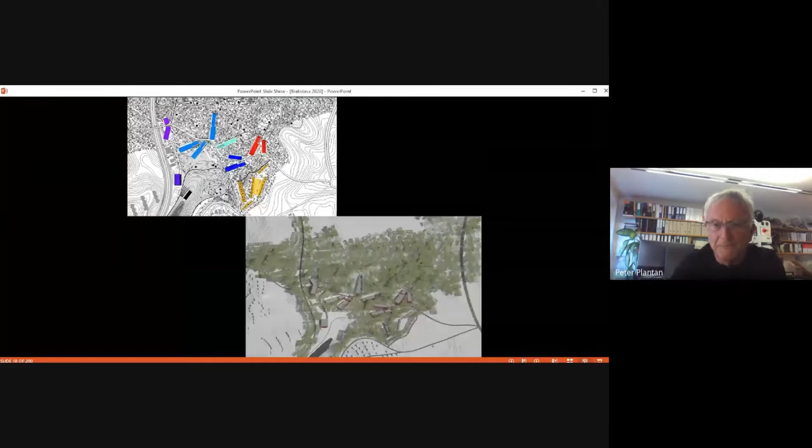It was, of course, wood, as you saw on the pictures. This is a kind of thinking of—I like renderings that leave some space also for imagination.

Elementary school in Novo Mesto. The project is a very old one. It's a project on the southern part of Novo Mesto, spreading its wings to prevent the invading dwelling or building of neighborhoods, so as not to invade the very beautiful valley below this school building.

The school building is composed of 3 parts. The central part houses all the common programs, meaning the main hall, entrance, main hall, access to the valley, and also the spaces for teachers, and below it all there's also a gymnasium. But the wings are shaped differently.

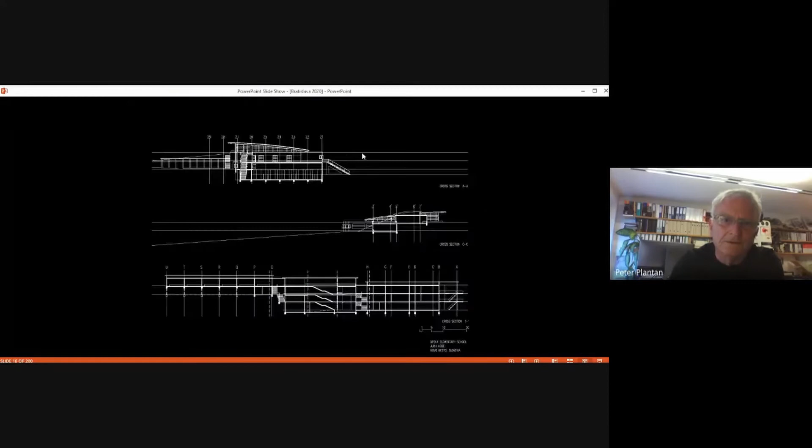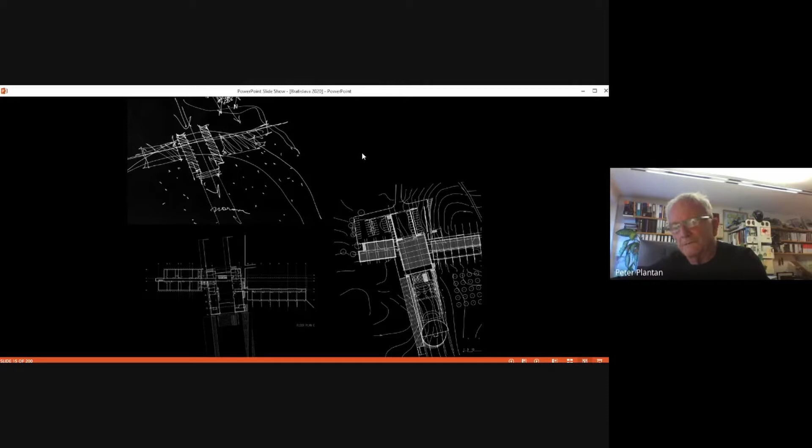On the left side, you see the wings following the slope in cascades, so that each wing is meant to house the younger pupils, so that all pupils can have their own access to the natural greenery. And on the west side, housing the bigger pupils, it's shaped in a more abstract and functional block, meant to light their curriculum in these spaces.

Secondary school for nurses in Ljubljana is a kind of conversation with the culture of the city. We called our competition entry 'the Palace,' making specific reference to typology found within the urban fabric of Ljubljana.

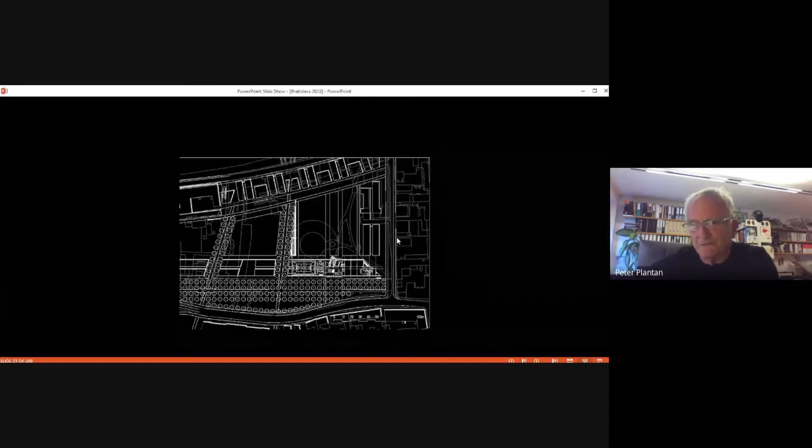So this is the face of the school, also divided in 3 parts. The central part has all the common program—library, entrance, lecture hall, and so on—and 2 wings with classes.

The facade towards the heavy traffic road references Slovene architecture. You see on the left side famous Savin Sever using a secondary facade with a very clever solution, because it's quite often that a secondary facade provokes a problem of sound penetrating from one space in the building to another, so that the space between the first facade and the second facade must also be divided if we don't want to have the same problem.

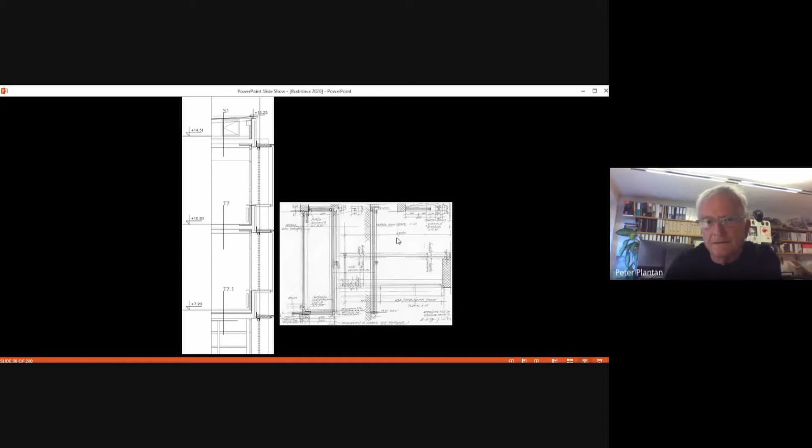See this, of course, our study of this glazing, double glazing.

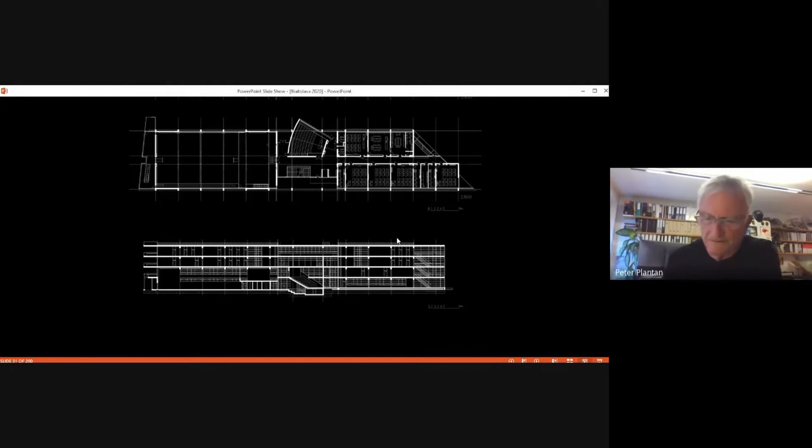And here you see how also the gymnasium is incorporated in the thin body of the school, as I said before, to save as much space as possible for the school playground. And here the span over the gymnasium is formed by the walls among the classes above. Of course, for everything, many sketches are made.

I present 3 open spaces in Ljubljana. We made quite a few, but let's say these 3 are very interesting, very different from each other. First is the park along a small creek, Gradaščica.

This is a gladly abandoned area in the very vicinity of the center of Ljubljana. We see here the entrance road to the center of Ljubljana, with a bridge at the upper level. The bridge gave us a bit of a problem because the span was already calculated and quite short, and the bridge needed to be very wide, so we had to find a way to prolong it.

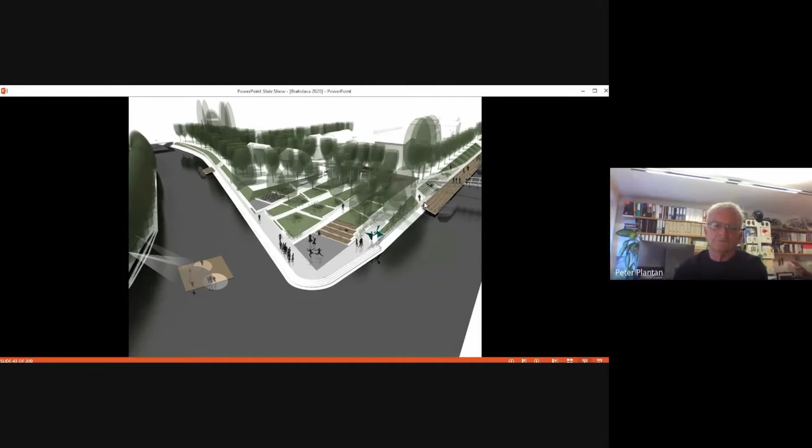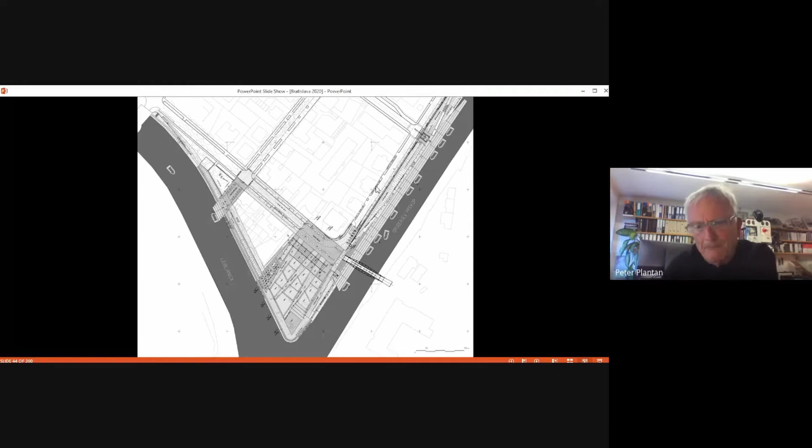It is composed of two parts. One is a slight slope going down to the Ljubljanica, and the other serves as an embankment for quite a few new boats now floating on the Ljubljanica. The modification of the park again listens to the urban fabric, and the slope is formulated by cascades and partly covered with wood. The situation is really marvelous.

It was quite a wonder that it was abandoned for such a long time, but it was not abandoned 4,000 years before, because when starting to dig in this area, a big settlement of those pile dwellings on pillars was discovered, so we had to modify the modulation of the relief, because of course those pillars shouldn't be uncovered.

They are still resting there. Some of these are of course preserved in museums, but this preservation is very costly, because wood being in water for so long doesn't resist touching the air once removed. Of course, some elements are also present here - this is a kind of bigger pergola serving as an open-air museum or exposition area for the visitors of the park.

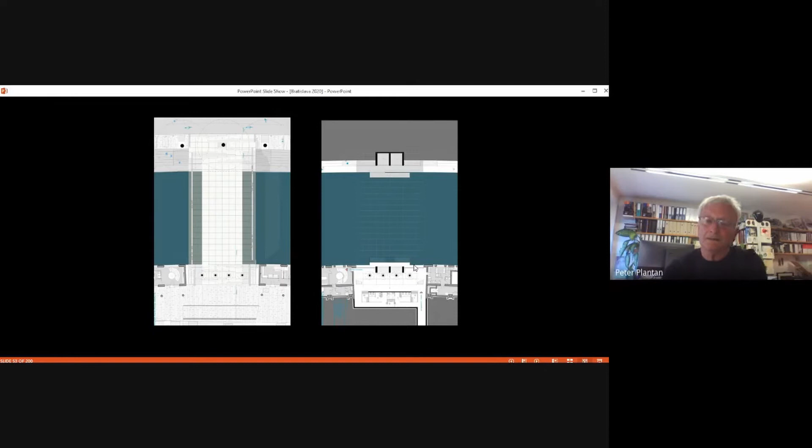It is very important also because underneath there is quite a dense program. It's an embankment for river traffic, it's a public lavatory, it's an entrance to the planned garage, and it's also an open space for a bar and a smaller restaurant. So the lower level of the bridge is very important too. You can see how wide this bridge is.

It's really actually nearly as wide as it is long. And because of the story of the butchers, on the part where it meets Petkovškovo nabrežje, Petkovšek's embankment, our sculptor Jakov Brdar made a sculpture, of course.

No, I'll... Prometheus. I'm sorry. Words go out.

Because this bridge is so wide, we made both sides of the bridge... this is a part of the lower level of the bridge, and you see we planted poplar trees in Plečnik's arrangement. These poplar trees were removed because of construction of the bridge, but in this picture they are still very young; now they are becoming bigger and bigger.

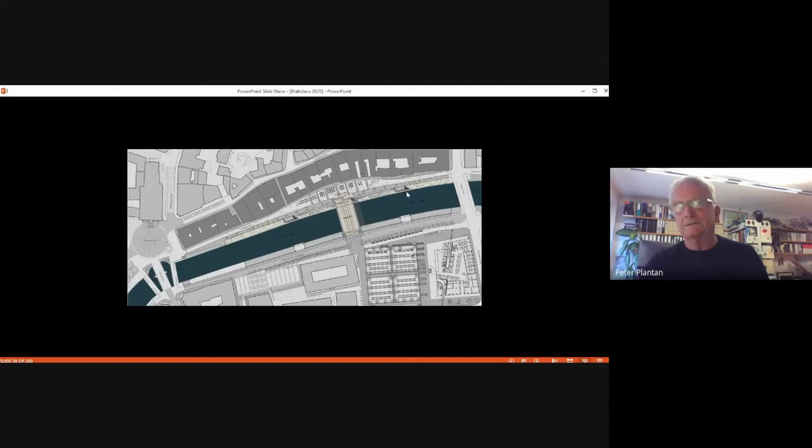So the Petkovšek embankment plan was actually very simple. We only had to arrange the quite abandoned area, suitable for bars and restaurants along the newly formed embankment, and they exploded in popularity a minute after construction finished. As I said, the arrangement was very simple.

The only thing we wanted to do but did not succeed was to make cascades down to the river bank, the very river bank. We were not allowed because the officers in the preservation office didn't want to permit it. It's still a painful experience.

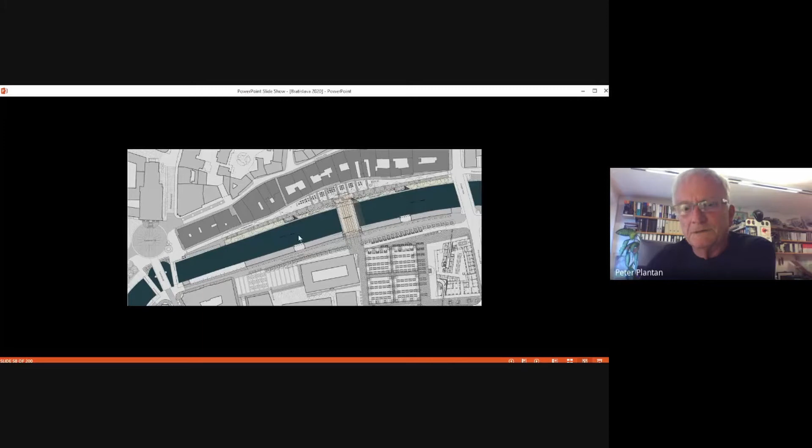So the only accent of our arrangement in this refurbishing of the Petkovšek embankment were two terraces made exactly vis-à-vis Plečnik's pavilions or tempietos, breaking the long building of the butchers' building. And a nice atmosphere.

In Maribor, we were also lucky to win the competition for arranging, actually performing, a complex in the minority... the Minorite monastery, sorry.

It's on the southeast corner of the center city of Maribor. The monastery was abandoned by law of Joseph II, because he closed many monasteries around Austria, and so was the story of this one.

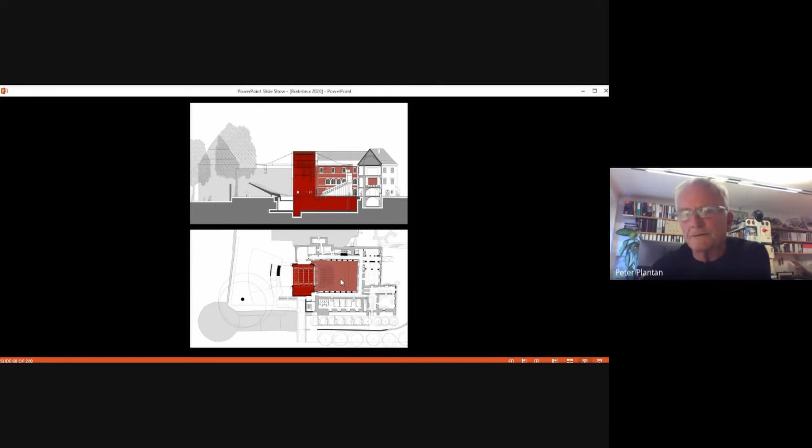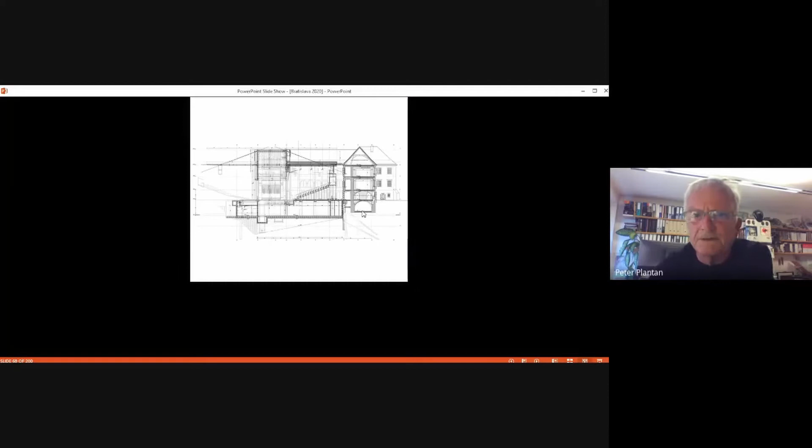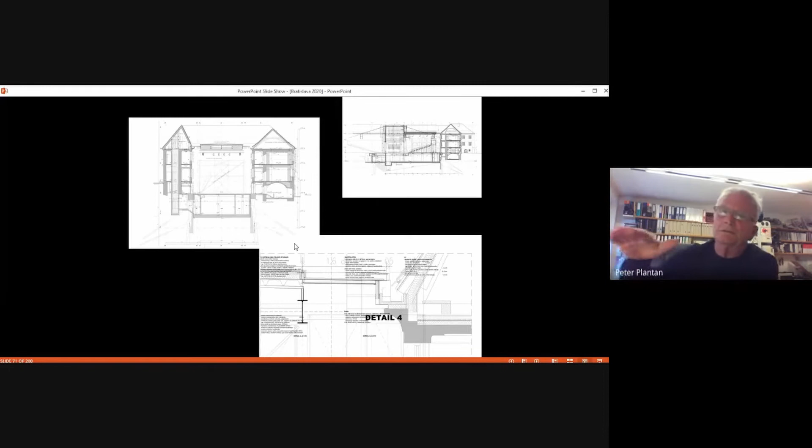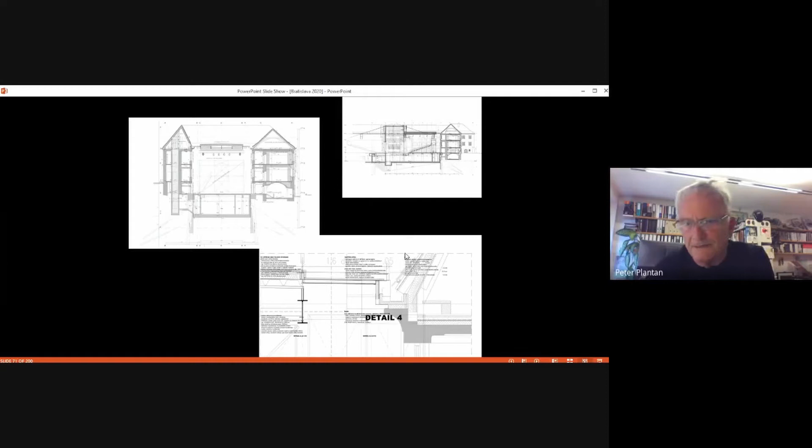Including the roof, which is carried by this fly tower, so that the roof does not touch—actually it touches, but does not lean on the existing structure. There's quite a clever detail, because the roof, being a kind of console, is also moving, and you must calculate how to design this touch between the new roof of the theater and the roof of the existing structure.

But there is also another embarrassment in puppet theaters, namely puppets can be very small, down to 1 decimeter, but they can also be 3 meters high. So we had to find how to adjust the adequate atmosphere and space for these different types of performances.

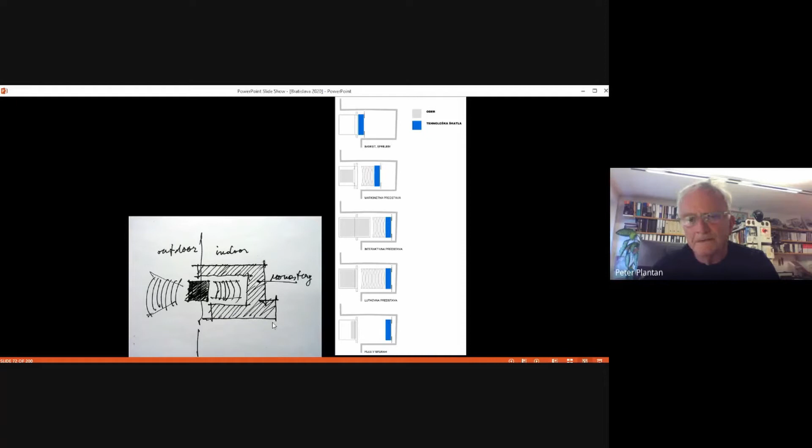So we invented a kind of movable wall. This movable wall contains all the light and sound cabins, and also first serves as a magazine for seats. This movable wall can move towards the stage, leaving all the space of the monastery atrium free for special types of performances.

So this is the stage, or the main hall as it is functional, as we were not allowed to make acoustic panels on the facades. The acoustic panels are only on the roof and the shutters of the windows.

Here you can see it's quite a complicated construction, and very thick. And here you see the back side of this movable wall. We also didn't want to touch the existing walls or ceilings for the other spaces in this theater. So everything is very carefully designed regarding how to touch, because this touch is very important.

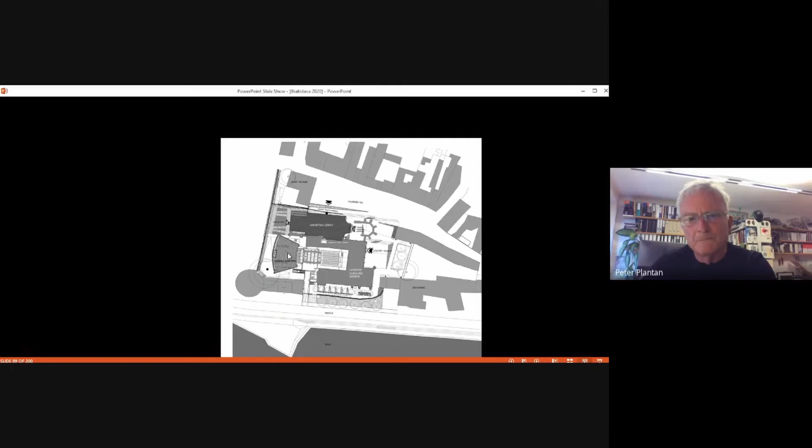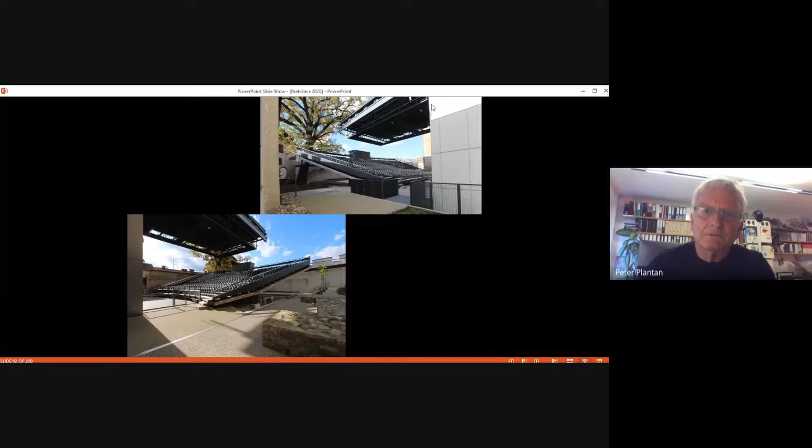So details are every time important. And as I already said, on the other side of the fly tower there is an outer space with about 600 seats, and all the machinery is situated on the roof, which also expands, with a cabin situated in this kind of flying atmosphere.

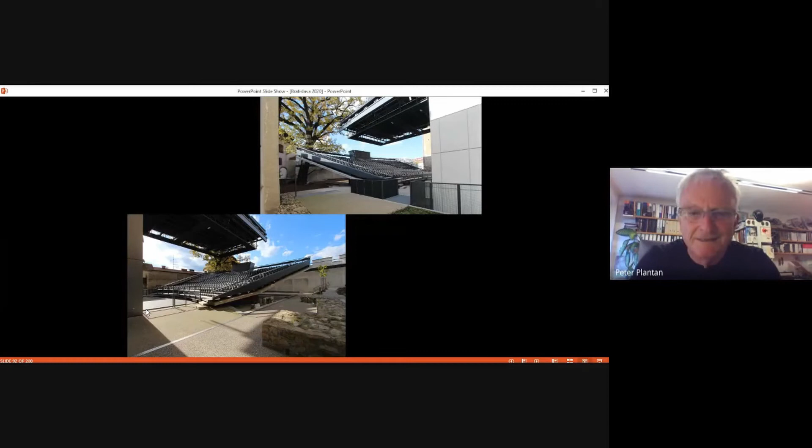The very important element of the theater is, of course, the bar that is open during performances, but should also be closed during times out of season.

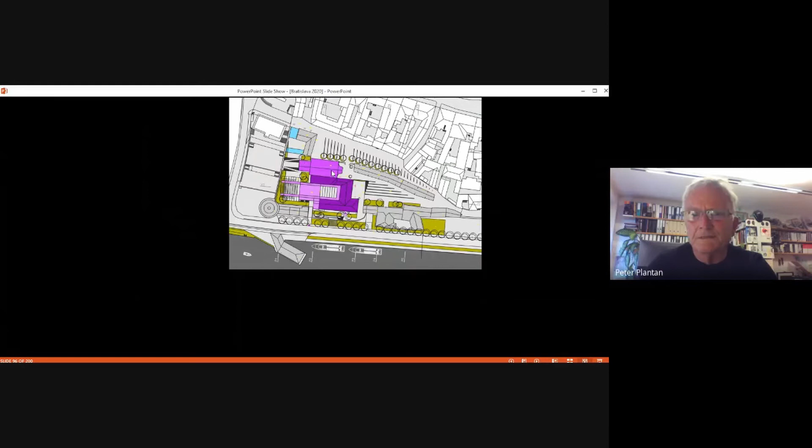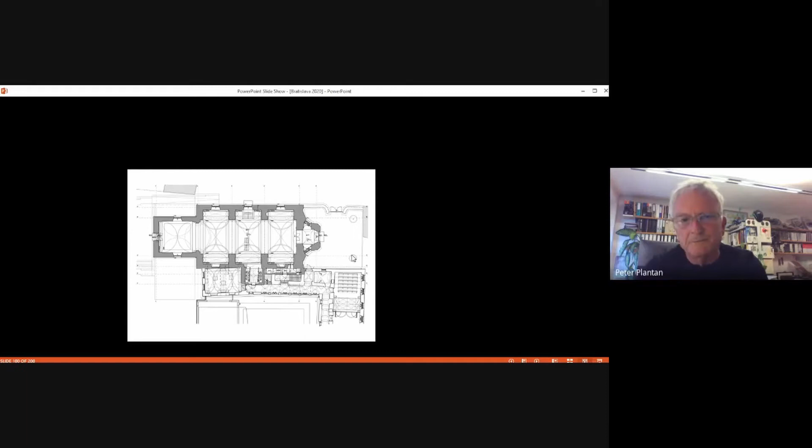The third element of this performance area is a church that was really abandoned and transformed into several types of functional spaces, so actually nothing original was preserved. Our task was to clean it and refurbish it as much as possible into its original shape. These are measurements that were made, and the church has its upper, or parterre level, and a small entry from the cellar of the monastery.

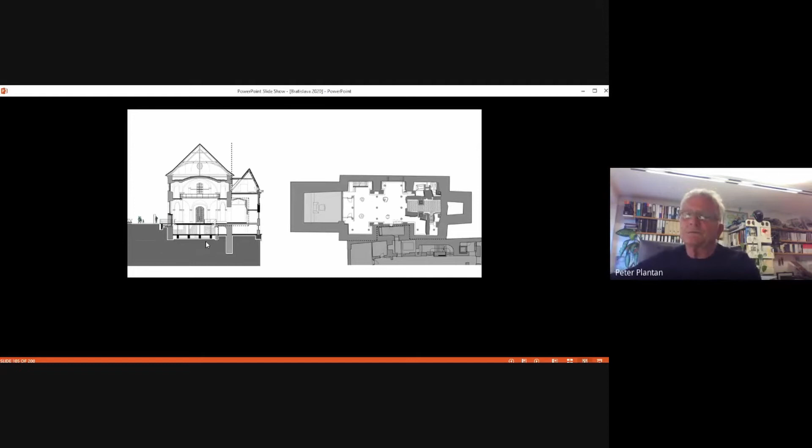As is always very interesting in refurbishing old constructions, the excavations revealed the whole cellar of this church, and in this cellar there were foundations of a Romanesque church from the 12th century. This became a special space for performances and exhibitions, with a special intimate atmosphere.

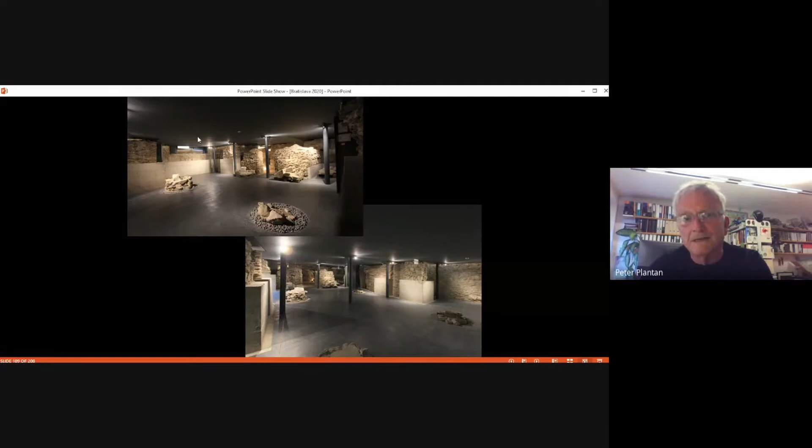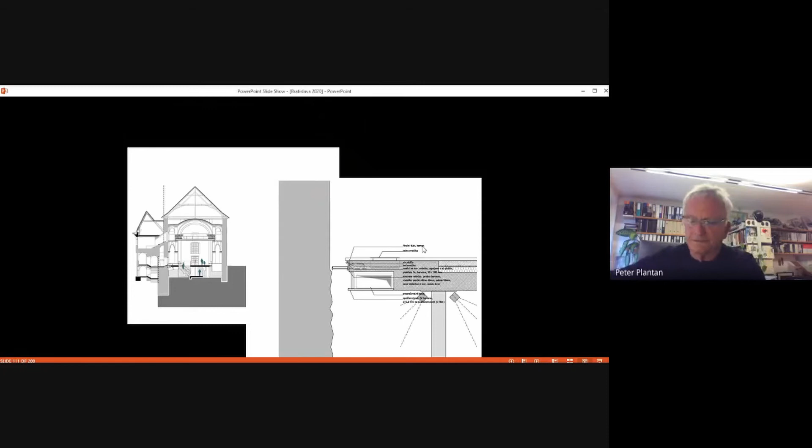And of course, how to make this plate, the construction of this new parterre. We made a concrete plate that does not touch the original structure, but includes all heating and ventilating facilities within this corpse. So from above you can see the upper floor through this gap. Partly the upper floor has openings so you can see the lower floor. Some details again, everything avoiding direct touch of the new to the old.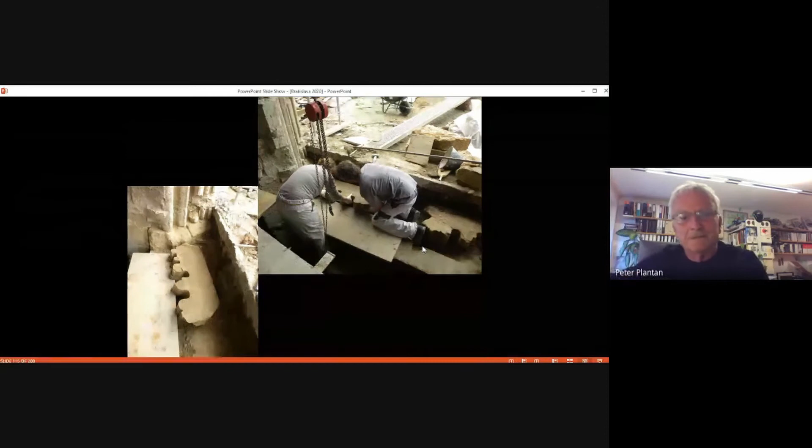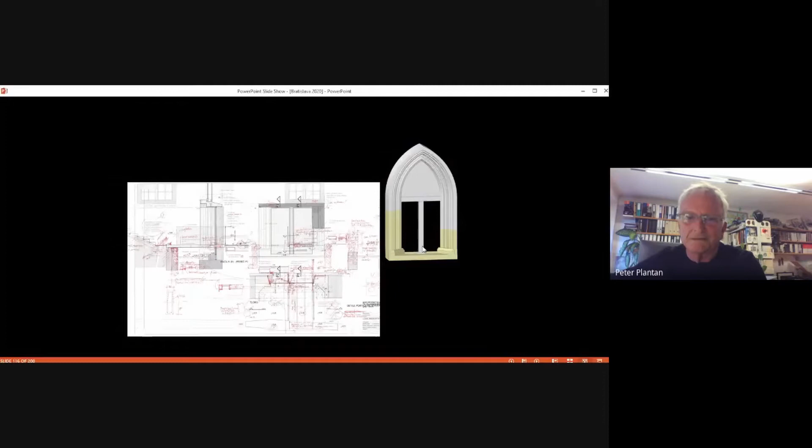And as every time, there are new discoveries, and a new Gothic entrance was discovered. At the end, when we were already finishing the project and the construction, this new entrance was discovered. You can see how time is merciless, and the Baroque opening didn't want to think about what was in the past. So now this is the entrance showing all stages of time in one side of one big frame.

Refurbishing the opera house in Ljubljana is - I hope I'm not going too long. What's the time? No, you are just perfect, you are not too long. Please continue.

The opera house is very typical for Slovene circumstances. First, of course, came the decision that the National Theatre would be built. This was at the end of the 19th century, and the first project was by the famous Austrian pair of architects, Fellner and Helmer, who made several theaters all over Austria or the Austro-Hungarian Empire. But of course it was too large and too costly.

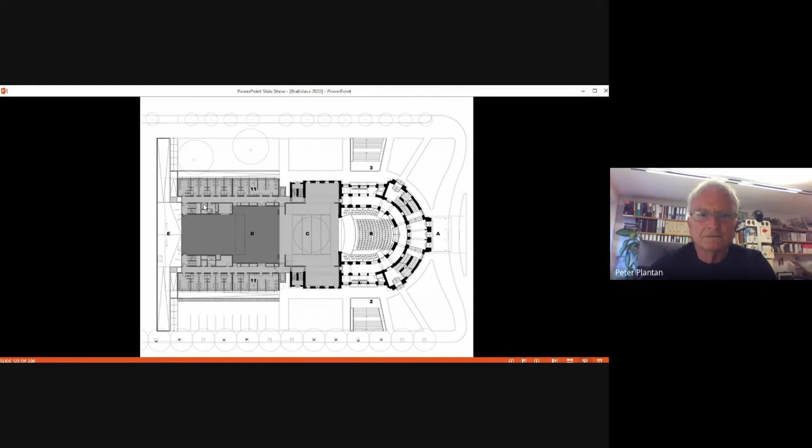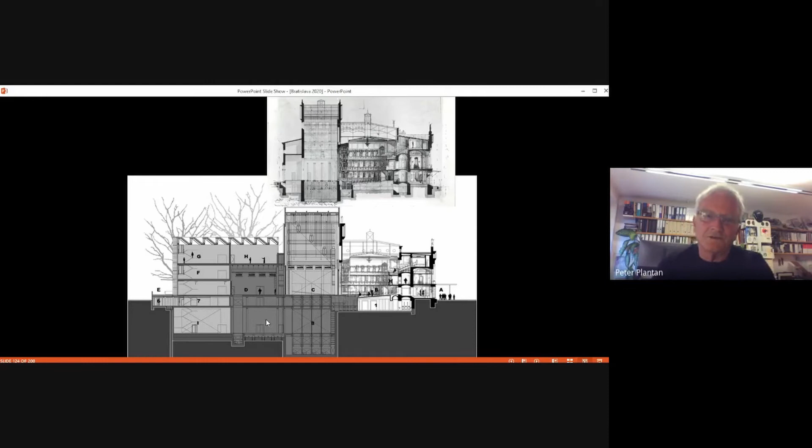We prolonged the building to make, at the lower parterre level, the entrance and backstage. Of course this backstage goes down too, with spaces for wardrobes and all else on the sides of this central space. Because we could not move outside, we found the space for the public during the breaks under the existing parterre of the existing house. Here you can see how big this new restructuring and refurbishment of the building actually was.

Here you see the backstage, the entrance, and then rehearsal halls in the central part, and in this section - I don't have it - the new spaces for the public during the pauses, also a new entrance with the ticket office, spaces for publicity, lavatories, and everything that goes with public access.

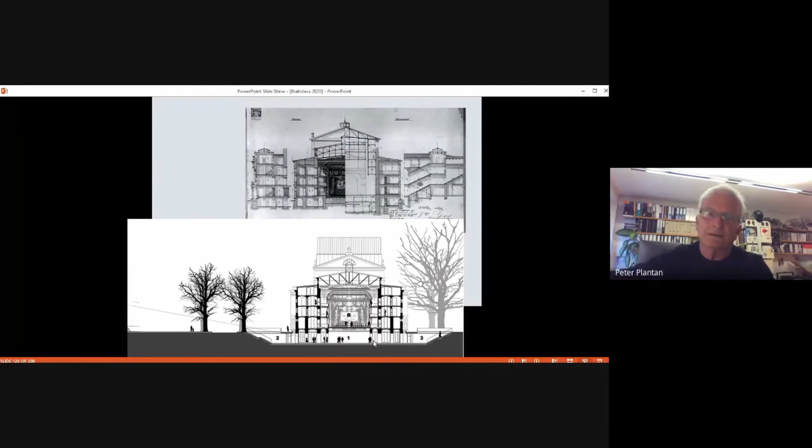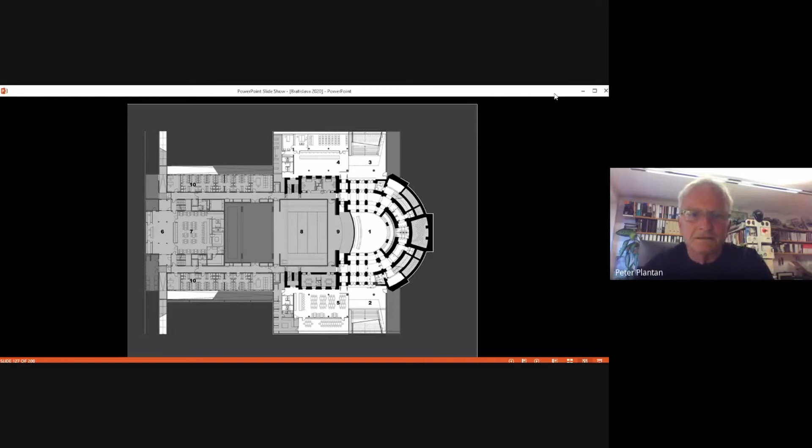Forming two atriums, this denivellation makes it a bit less harsh. Of course, when this structure began, there was quite a revolt, because the new addition was quite brutal, but it was really very necessary, so that everybody working now in the opera house is very happy.

Here you can see how the lighting works for rehearsal. It's a very simple solution, but all the technical stuff like heating, ventilation, and so on is incorporated into this part of the ceiling or roof.

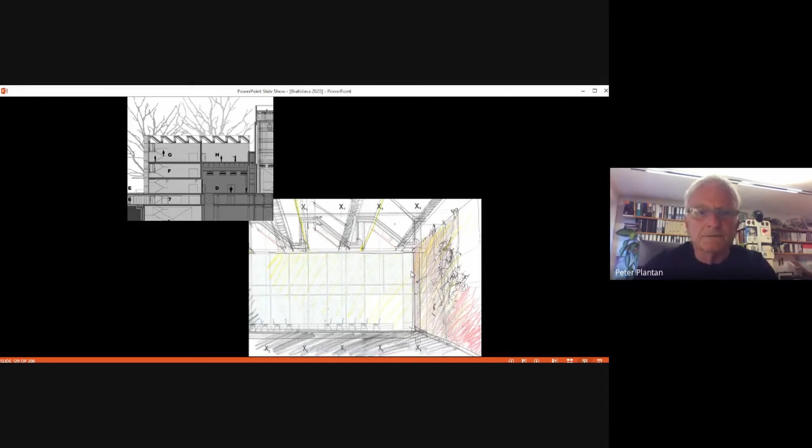These are, I think, two spaces for orchestra and ballet. You can see the atmosphere of the corridors, which are very narrow, and we were very much concerned how these narrow spaces serve the performances.

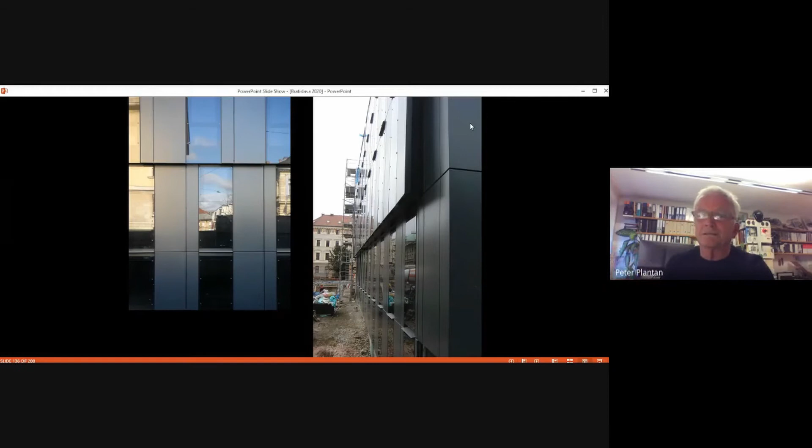These are a bit better - changing rooms for actors. Again, very important was this second glazing, here even more than in the offices, because every wardrobe also serves as a kind of rehearsal space for singers, so the voice mustn't travel from the lower to the upper level. This kind of second glazing is constructed as you see in this detail.

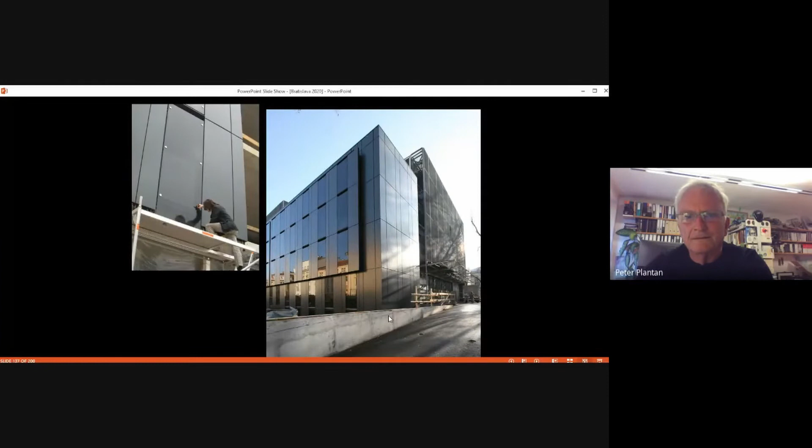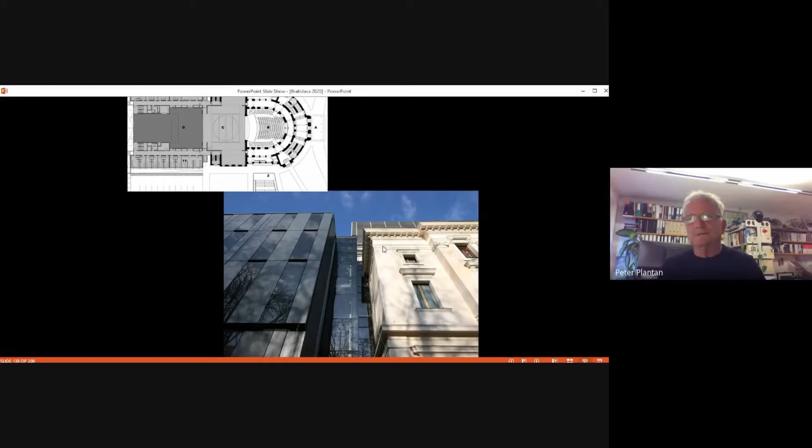Important, as I always say, is the touch between old and new, and I think these gaps are very important. In this gap there is, of course, an elevator.

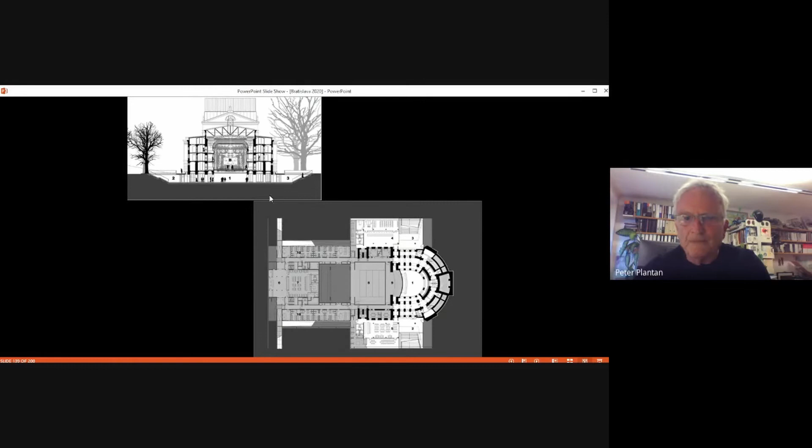This part is for visitors. Under the parterre you can see two atriums. This atrium, towards the center of the city, is a ticket office and public relations, and spaces for publicity. The other one is a space for an opera cellar, a restaurant that is obligatory, but still not done.

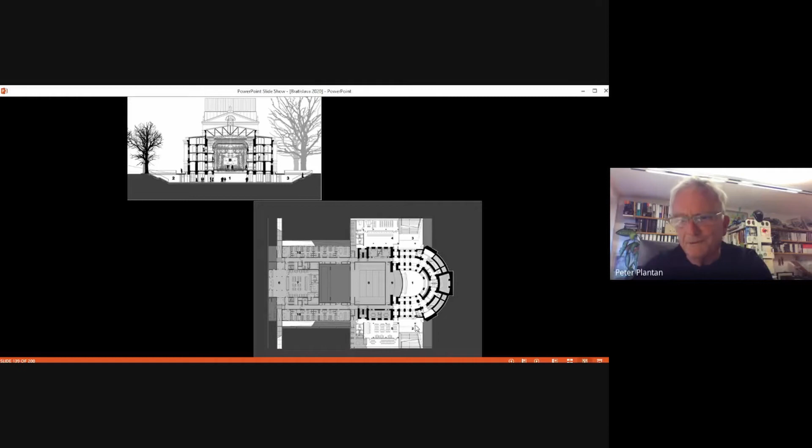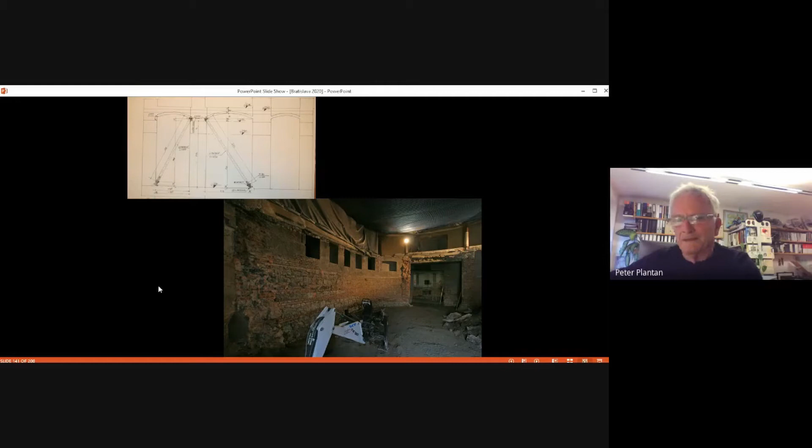Of course, several sketches were made of how to create new spaces under the parterre, spaces that could still be adjusted to the atmosphere of a fin de siècle opera. The works were very Egyptian in a way, you can imagine, and this is how it looks today.

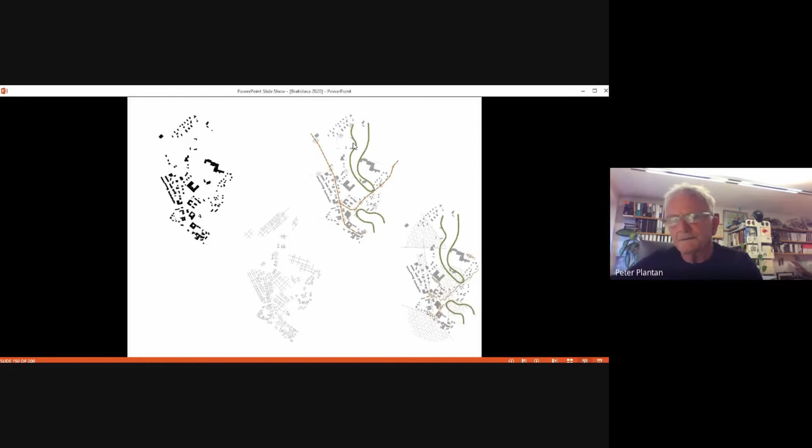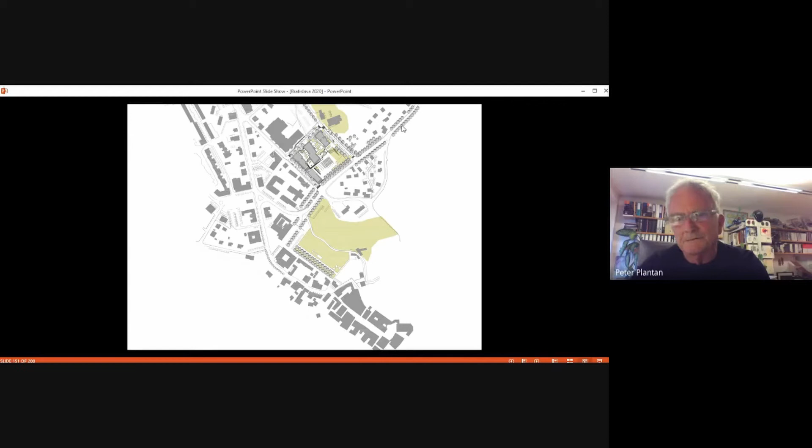Because the space is very fragile, we began by studying the structure, the tiny urban net, and we wanted to approach it as harmlessly as possible. So we had the task of making a new center of the city with a main square lining the main road entering the city center.

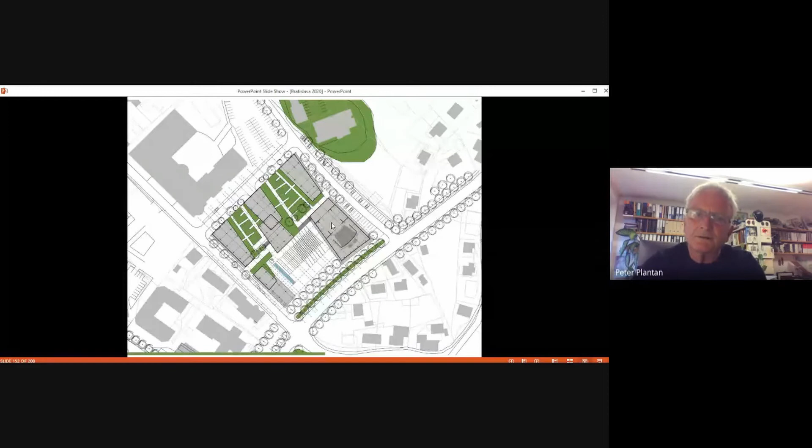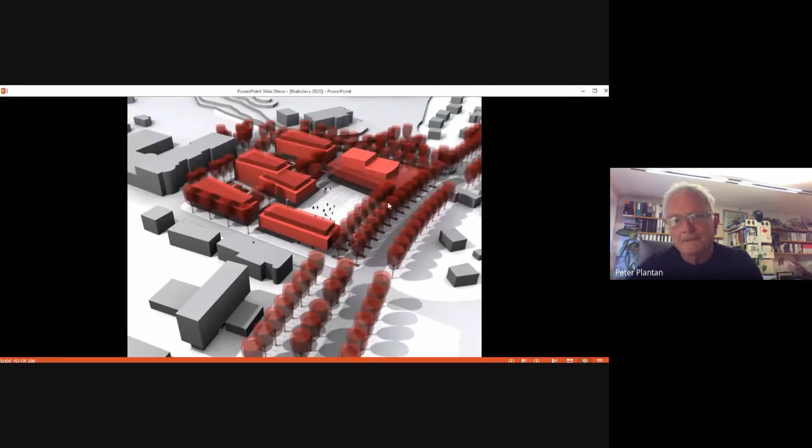One facade of the square consists of apartment buildings with, of course, a public parterre. The southern part is a library and the northern part is a cultural center, opening one side of its stage to the newly formed square. Here you can see that.

After the first phase of the concept, we divided these apartment buildings among other architects. We took this central one, and us being in an apartment block, we wanted to approach the love of flowers on the balconies.

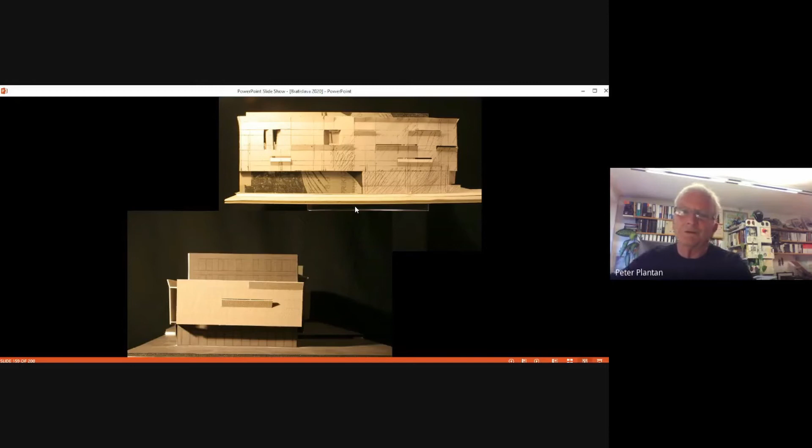So the preliminary studies were about how to make space for flowers on the facade. This is the final model, and the ground floor is public, a big restaurant, while the upper levels are, of course, dwellings.

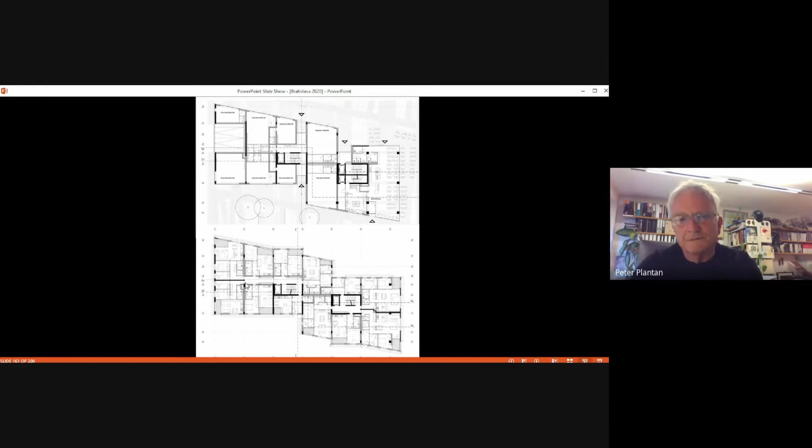What I want to stress here is that we endeavored very much to make you enter the living area just as you enter the dwelling, because that's not the case every time. Very often you enter a dwelling passing through all the other rooms before reaching it.

Then the library, being very ascetic - there was never enough space for it. We made one, then another, and again it was full. So it's very abstract, very rational, but still you have some interesting spaces in this building, with the parterre opening to the square.

This allows mainly children to play, also in less favorable conditions, and of course there's a rooftop terrace.

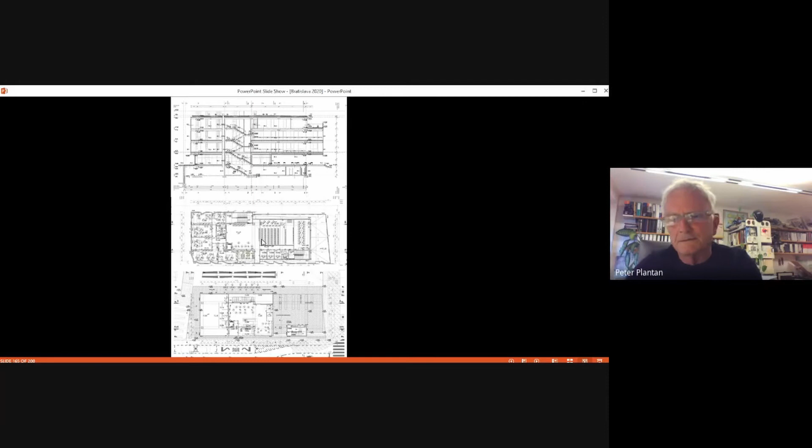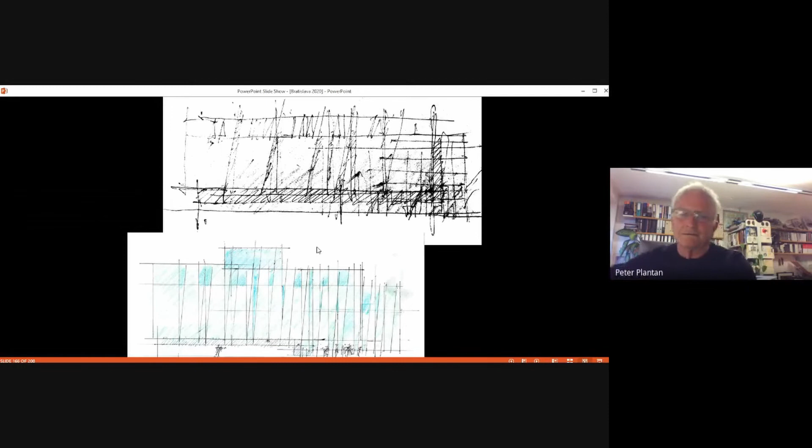A study of the facade that can, let's say, evoke a kind of foliage of leaves. This is the outer look.

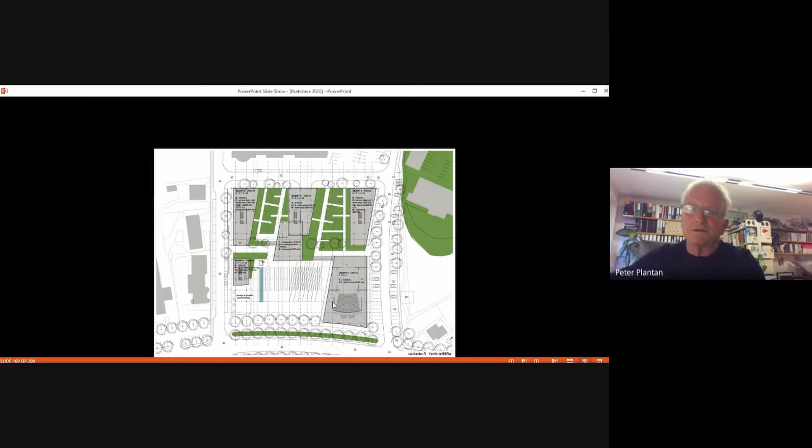An office, and the upper level with access to the terrace. Of course, the cultural center is still in dreams, waiting for better times. You can see this opening of the main stage, also opening to the square.

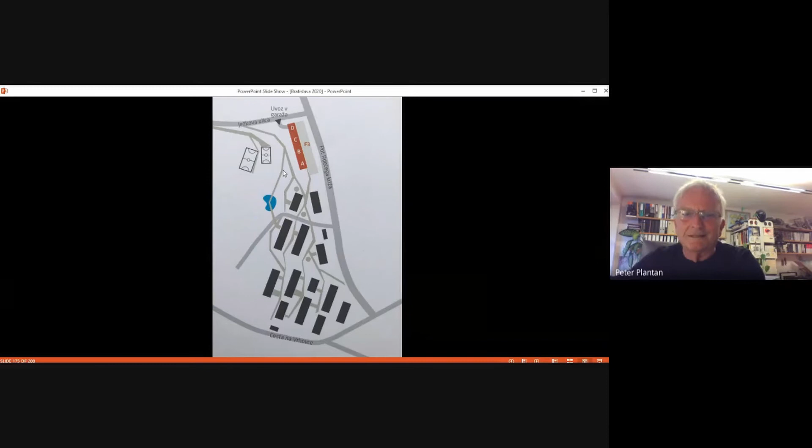I will show you also a very funny project. It's in a new settlement, can't say neighborhood, in Ljubljana, with, let's say, normal blocks and our not-so-normal block.

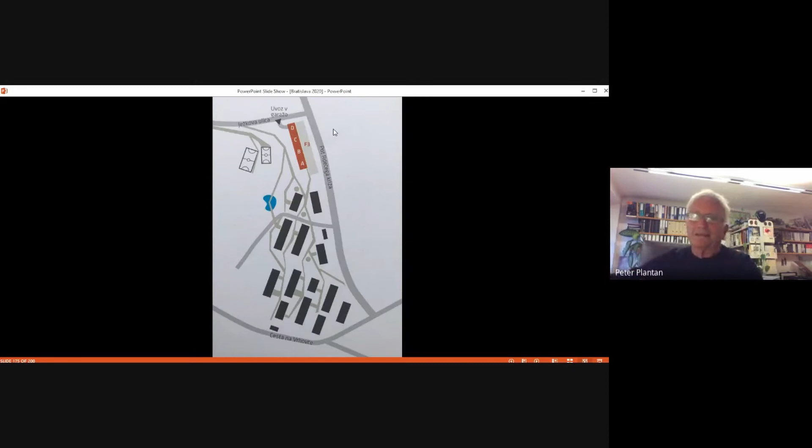This is the very funny 'squadra'. Four teachers from the Ljubljana faculty were asked to join and present their visions for a block that would be called the experimental block. So we were allowed to experiment with everything imaginable in building design - the structure, the type of dwelling, the ventilation, heating, and so on. And it all began quite interesting.

We were quite far with this project in the preliminary phase, but when coming to the executional phase, the investor became more afraid of customers who can come with their lawyers and demand exact dimensions of certain spaces in dwellings that are not normal - let's say corridors less than 120 centimeters, but because in this way the dining room can be bigger by 30 centimeters and so on. So in the end it is a funny building, more designed than really experimental. But the wish was very good, and maybe the next experimental block will be more experimental.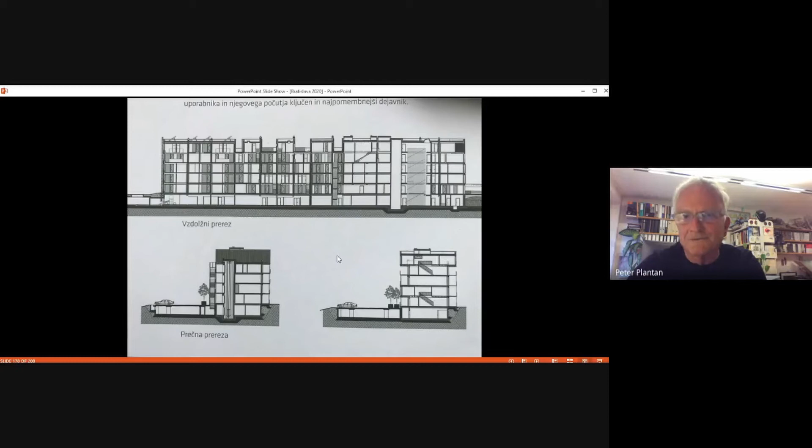I didn't present - Aleš Vodopivec, Janez Koželj, Tadej Glažar, and the execution guy, and me. Here you can see the section, very interesting, because the block was simply divided - Aleš Vodopivec, Tadej Glažar, Janez Koželj, Jurij Kobe - it's in slices, like a sausage.

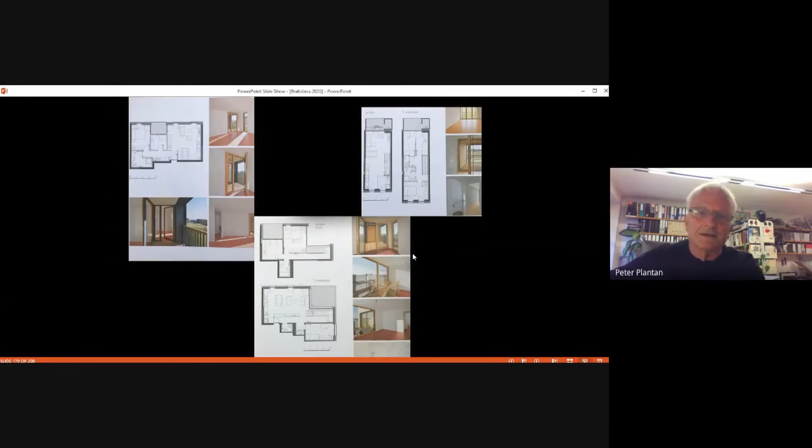So you can see very different dwellings, from very small ones, bigger, and the biggest, in various compositions. But these are only floor plans. You must also count that in some dwellings, ventilation was really different, heating was also different, but actually the dimensions of spaces were quite standard.

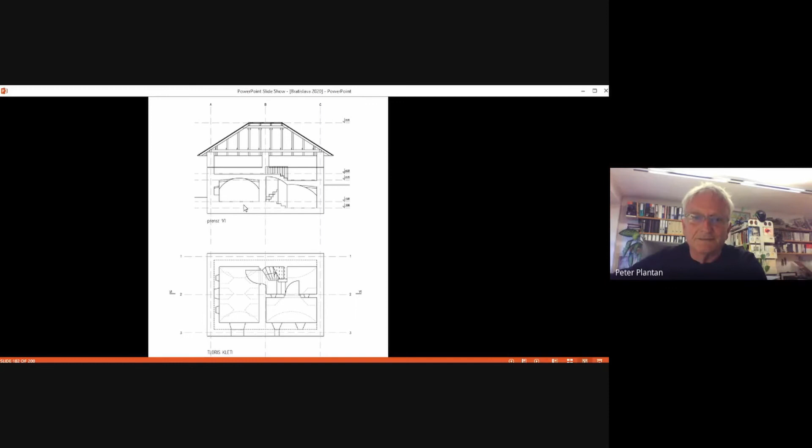The museum's theme is very sober - data on the upper level, and simply the places where they were tortured in the cellar. We tried to say that something is being held in this old construction in a new way, so the metal nets are a bit bigger than necessary - a net against cats and birds, and of course against those who want to enter without being allowed.

The sober data and illustrations are exposed on the upper level, and this lower level, the cellars, were only artificially illuminated, and the door wings were changed. They are now metal, and they bear the names and portraits of victims, and they are too big to be closed.

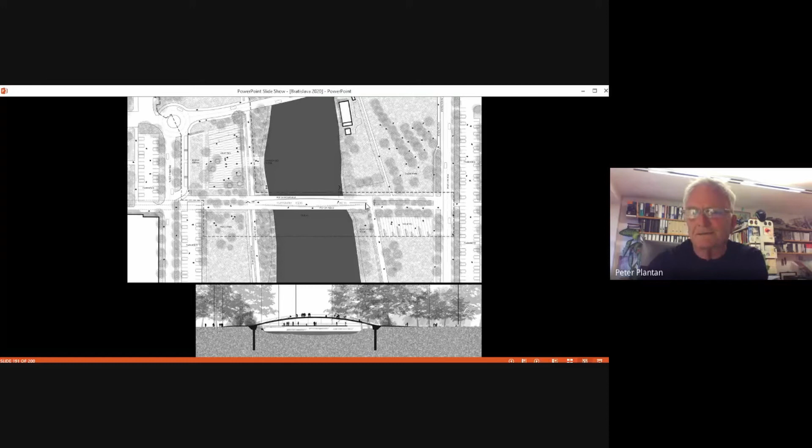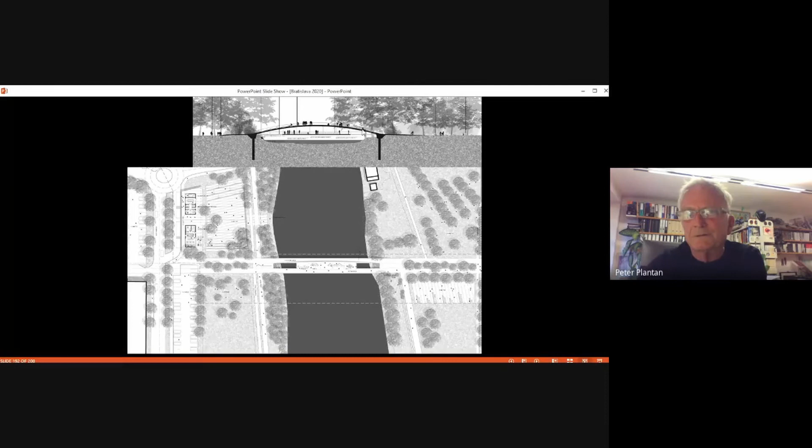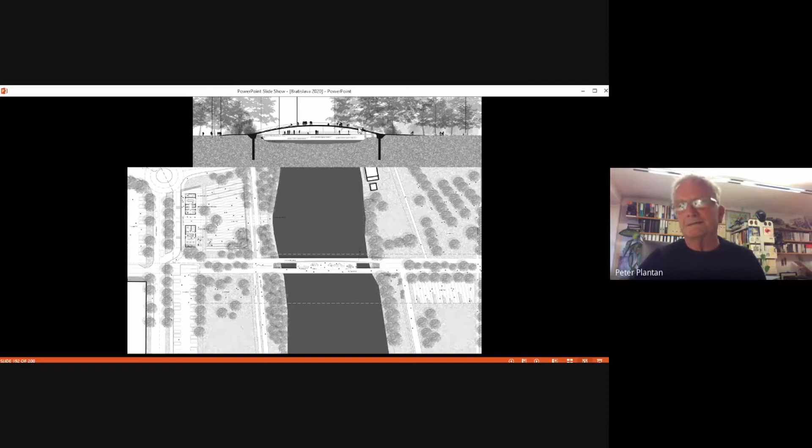So we tried to create this adventure atmosphere simply through the structure of the bridge. The bridge carries a span of 70 meters, a kind of arch connected with the lower level of the bridge, which serves as a pedestrian promenade and cycling path that should be separated. The pedestrian promenade on the lower level is also enlarged by the space under the arch, which can also be used as an adventure space for younger people or adults.

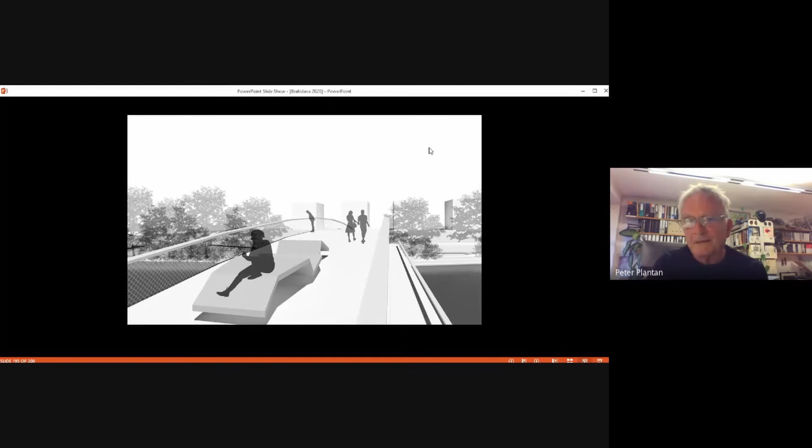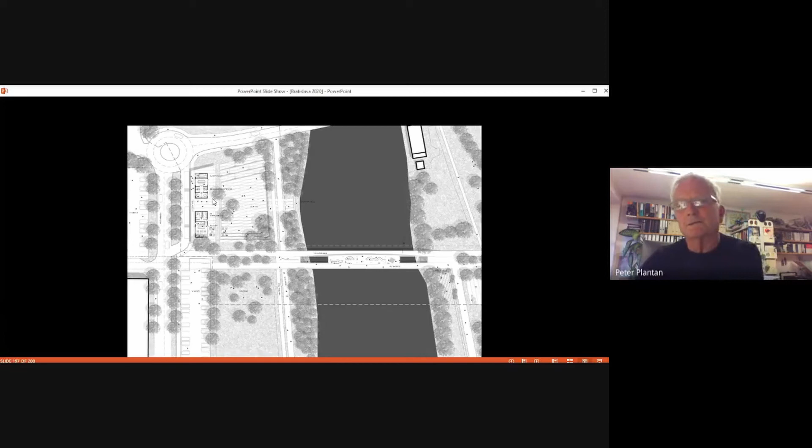Here you see the atmosphere of the bridge and its surroundings. The bigger square's program has a kind of pavilion with a small restaurant, spaces for the local community, restrooms for bus drivers - because here the public traffic makes a kind of return - and some space for skating and gathering outdoors under the bigger roof of this pavilion.

Thank you. Are you still listening, Jurij? Thank you. Yes, we are still there. Or are you sleeping?

Hello? Now you can see us. We are not sleeping, we are still here.

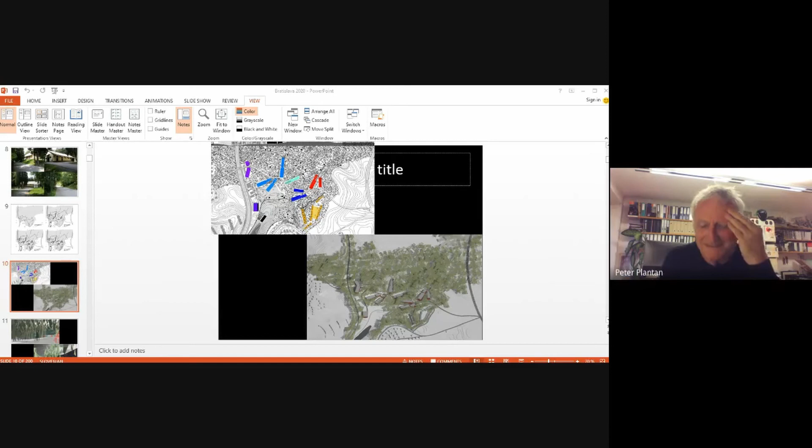Yeah, it's a very interesting question. It happens very much with those architects who change their attitude often and modify their buildings according to time. I'm afraid of this. Well, I admit that the development of a project is something relevant, but the development must really be based on rethinking of the circumstances—I mean development including changes, that means rethinking of circumstances and other things. But otherwise, I think that, of course, the project develops. The project does not change.

Thank you, that's nice, thank you. We have another question, from student Karina. She says: greetings, Mr. Plantan, your work is very sensitive to the surroundings. Could you describe how you work with the landscape? Do you include it in your proposal, or is it built on cooperation with a landscape architect?

Well, of course, we cooperate with landscape architects, but still, I think, since I do not separate buildings and nature and landscaping, I'm very much involved in landscaping in all projects. Yeah, okay, thank you. We hope it was enough for Karina, but we have another question.

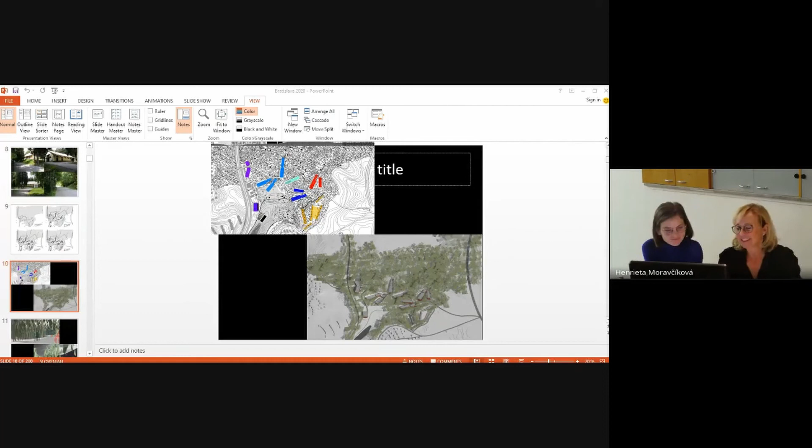It comes from the very beginning of the project, that you somehow think about the sculpture, and it's an integral part of the project when you work with sculpture. Am I right, or perhaps I was not that clear? I feel in your work the sculpture is not an addition that comes after the design process, but it's there from the very beginning, in your vision. But anyway, I think we now speak only about the sculpture as a piece of art which is included in the architecture.

But I have in mind also this other possibility of cooperation, which was so common in the 60s, for example, when architects used to work with sculptors as partners, actually designing the space or the form together, and this might be even more exciting.

That's a very nice addition, and I'm appreciating very much those times. This 60s, 50s, 30s were very, very fruitful, and we should learn very much from those times still. The architects should come out from their offices and speak more with other artists, not only with clients.

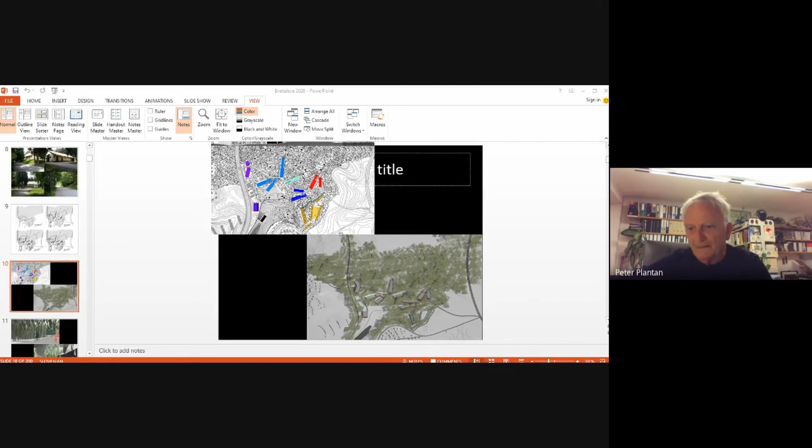Okay, we have the last statement from our students, and this is: thank you. So, Peter, now you are free. Thank you very much for the wonderful lecture and for all these great ideas that you shared with us. I was really impressed, and I hope our students were as well.